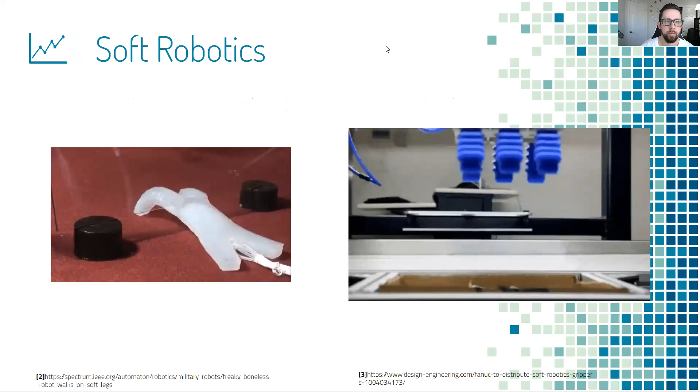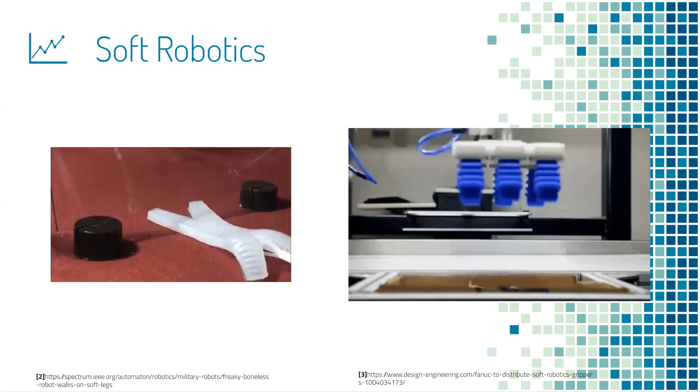Soft robotics are robotic systems made from all or mostly compliant materials, which can be advantageous compared to their traditional non-compliant counterparts. Soft robotics attempt to mimic many of the mechanical body systems found in nature. Having non-rigid or soft components, they are generally more adaptive, flexible, and resilient, and therefore can be more successful in harsh or unpredictable environments, as well as being potentially safer for human-robot collaboration.

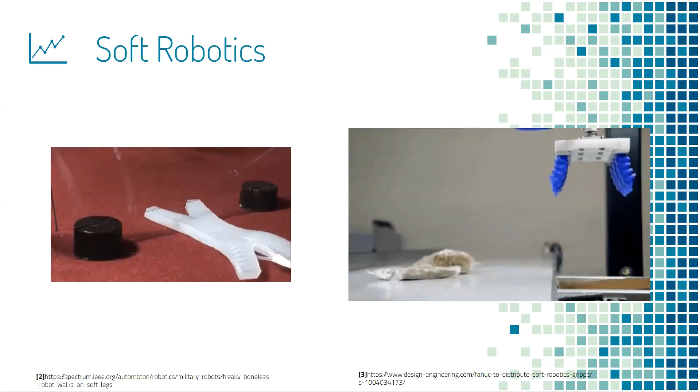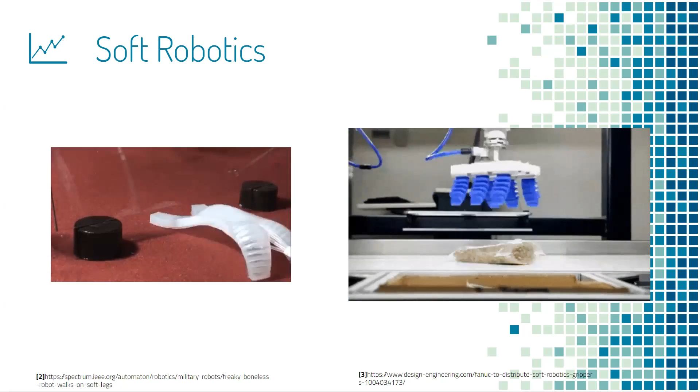Soft robots are less likely to undergo plastic deformation or mechanical failure due to impact or extreme external forces because of a compliant material's ability to elastically deform or dissipate forces. Soft robotic devices range from groundbreaking research-level concepts such as Harvard's variable gait crawling robot on the left, to refined products for industrial applications such as Fanuc's robotic gripper on the right.

One variety of soft robot, known as a tensegrity robot, is made of rigid, compressive members that are held together and in place by elastic tensile members. This combination of rigid links and elastic tensioners has been believed by many to be nature's preferred design scheme, as it is found in a multitude of different organic body systems, such as skeletal muscular systems, where rigid bones are held together under tension by muscles, tendons, and ligaments.

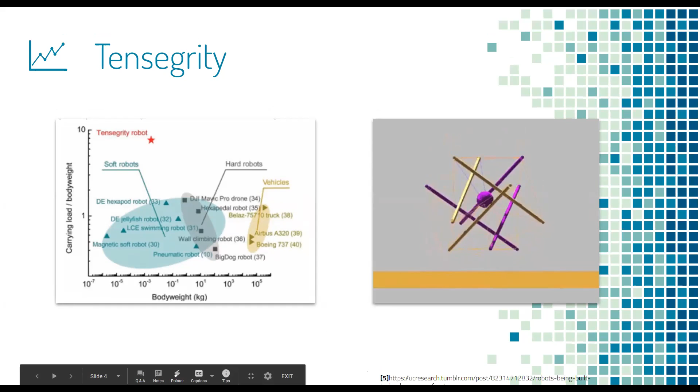Tensegrity robots are deployable, which is advantageous for applications where weight and size restraints are of high importance, such as space exploration. Spherical tensegrity robots are ideal for absorbing and distributing impact energy, such as ground collision after a substantial fall, as illustrated on the right here.

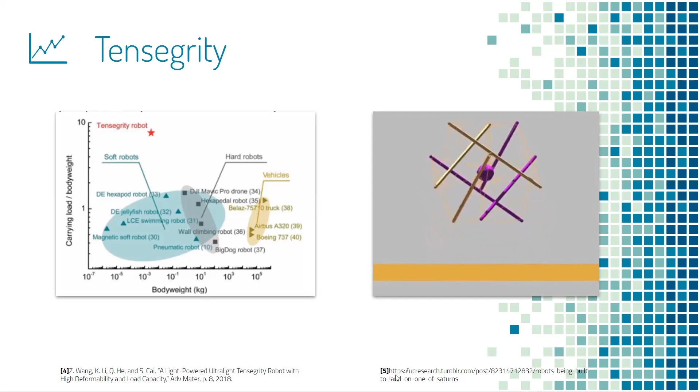On contact, the impact energy on a given rigid link is transferred to motion and further distributed into a combination of the six elastic members attached to it, and then eventually the surrounding links.

Various research groups have been investigating the benefits and attributes of tensegrity robots, and there has been an impressive amount of progress made over the last decade, but there are still many advantages to explore and challenges to overcome.

For instance, these two robots, the NASA SuperBallBot and Berkeley TensegrityBot, are great examples of large-scale, well-designed tensegrity robots. However, they are built with mostly rigid materials, making them heavy and more susceptible to catastrophic plastic deformation. Because of their traditional motor-driven cable actuation, they have an inefficient energy transfer and are not easily scalable, and require additional sensors for systematic feedback.

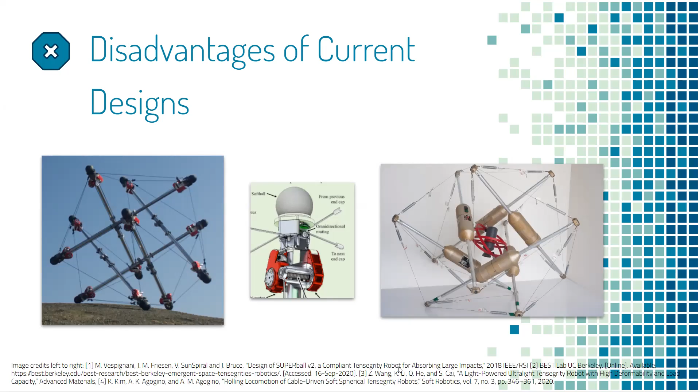There are also more complex tensegrity spheres with additional rigid links which are capable of traversing in a large selection of directions, but at the cost of simplicity, weight, and power consumption.

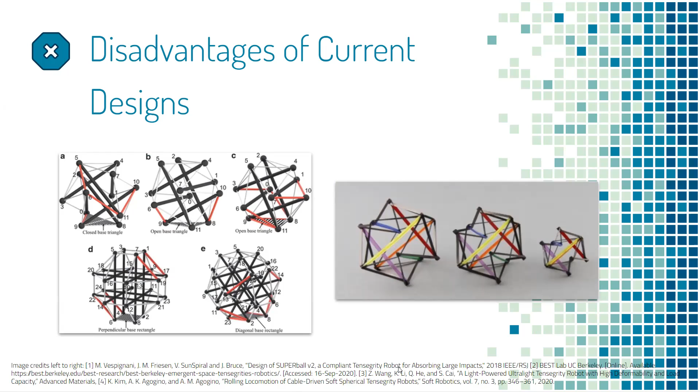Dr. Wang at UC San Diego has developed a small light-activated actuated tensegrity robot, shown on the right here, which has the drawbacks of being very slow to activate and is not self-contained since it relies on an external laser for muscle actuation. This scalable model could be improved by the addition of a lightweight, compliant, efficient linear actuator.

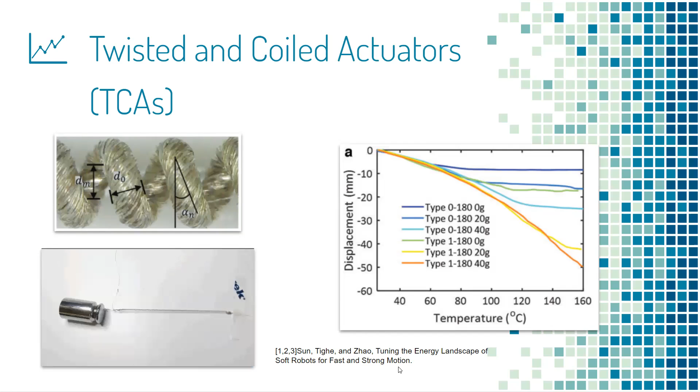Because TCAs are simple and made from common materials like nylon thread or fishing line, they are relatively cheap to produce. They have a large work density similar to that of a jet engine, at about 5.3 kilowatts per kilogram, and can produce a force approximately 100 times larger than a human muscle of the same length and weight.

They can be actuated using a low voltage power source and can simultaneously act as sensors to provide information about their displacement and deformation. TCAs produce no noise or visible emissions, and unlike traditional actuators, TCAs are made of compliant materials, making them ideal for soft robotic applications.

Our specific variety of TCA is unique in that it does not need to be pre-strained to achieve large stroke displacement of about 50% its natural length. The video on the bottom shows some characterization experiments and applications from our previous work.

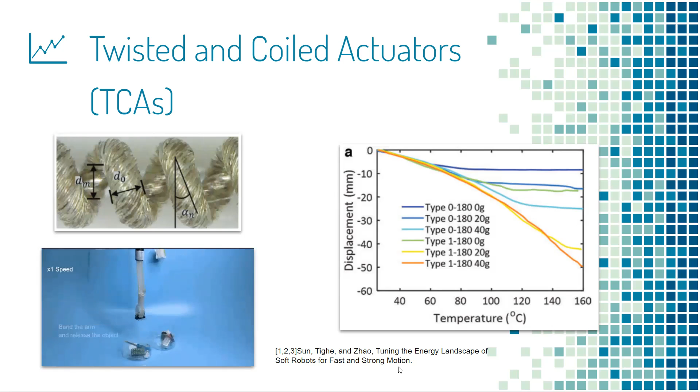In order to help organize the research process, we split the overall project into various logically ordered measurable goals, or specific aims. My first specific aim was to determine the optimal TCA configuration for this application. By adjusting parameters such as the helical angle, diameter, and annealing temperature, we can tune the TCA for a desired stiffness, displacement, and actuation force.

My second specific aim is to develop a modular tensegrity robot design to optimize time and resources during developmental testing. To avoid spending hundreds of hours building a robot that may catastrophically fail in seconds, we can modularize the system so that single components can be repaired or replaced. For instance, by developing a way to quickly remove and replace the mechanical and electrical connections of the TCAs, we can replace faulty units and test TCAs with different attributes without having to build a new robot each time.

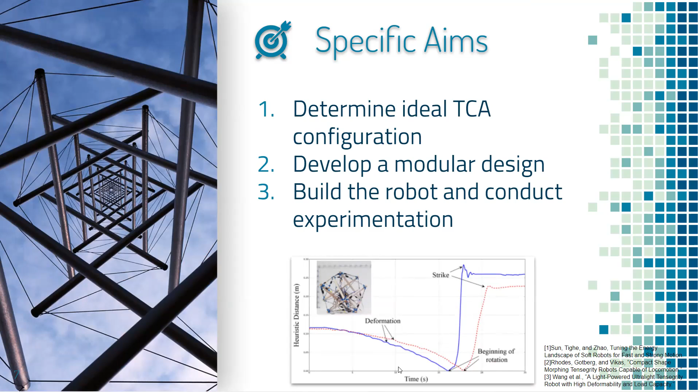Finally, my last specific aim is to build a robot so that it can be used for experimentation to collect data for quantifying its behavior and validation of theoretical calculations. I expect this to be the most difficult stage of the project, as there will likely arise complications and new challenges with the design.

Of the dozens of publications regarding 6-link icosahedral spherical tensegrity robots, 2 of them were exceptionally useful in determining the mechanical aspects of said robots: a thesis by Dr. Kim at UC Berkeley and an advanced materials journal by Dr. Wang at UC San Diego. Design parameters such as link length, actuator length, stroke and force, and pre-stress tension were derived from these publications and altered to fit our model.

Investigation revealed how center of mass manipulation can produce locomotion by essentially deforming the spherical tensegrity structure until the projected center of mass crosses over a chosen edge of the icosahedron space, causing the robot to topple in that direction.

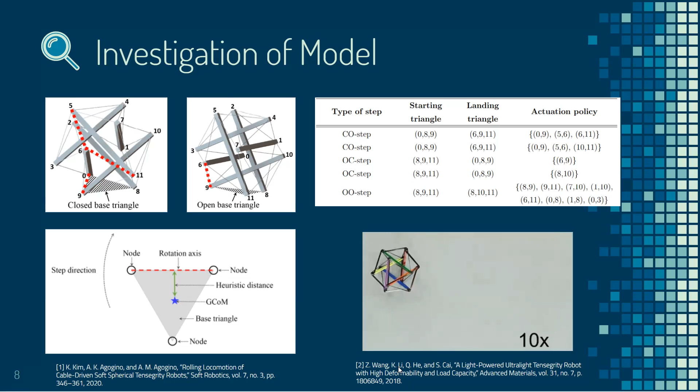The first step to developing a modular design was defining the design criteria and constraints. Some of the primary design considerations were to have an ability to make mechanical and electrical connections easily and quickly, to be able to maintain an appropriate TCA termination angle and position, to have efficient management of all the necessary wires, and to be able to adjust the tension of the installed TCAs.

Creative ideation and brainstorming led to several rudimentary ideas that were sketched out and refined. An initial design review was conducted with a panel of qualified individuals before the second round of brainstorming. Finally, 4 initial designs were considered, and along with the design requirements, a Pugh's design matrix was implemented for concept evaluation, and a final design was chosen.

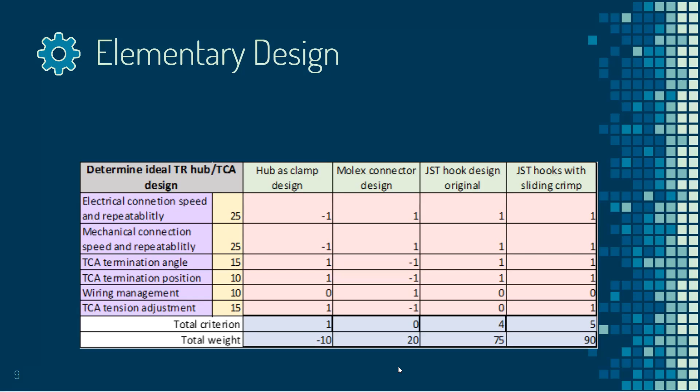The best design from the previous step was modeled in SolidWorks for multiple reasons. Having a 3D model of each component is necessary for 3D printing those parts, but can also be useful for performing finite element analysis and geometric and kinematic studies. I modeled each component of the Tensegrity robot and created an assembly to verify how they would work together.

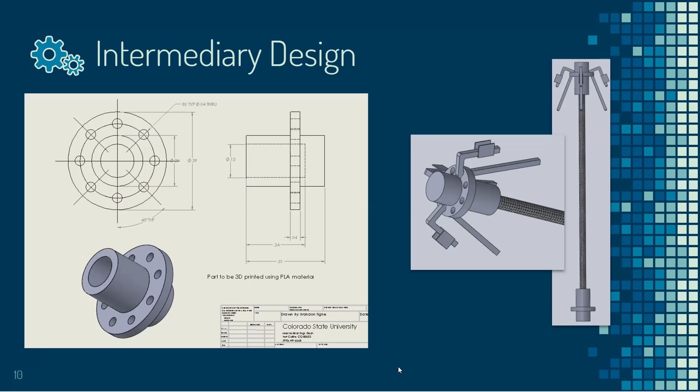The solid models for hubs were converted into a vector format, then sliced and printed using a Prusa MK3 1.75mm FDM printer and MatterHackers PLA filament, which was chosen for its high strength to weight ratio and dependability. 6 3.2mm diameter carbon fiber rods were cut to 100mm length and given a 1mm bevel using a Dremel tool before being fitted with the PLA hub on either end.

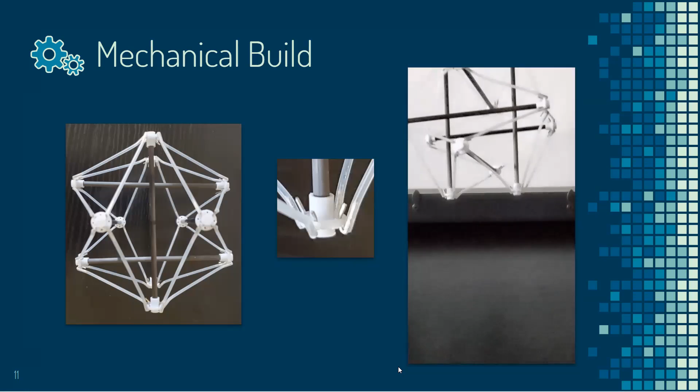The first iteration of the robot consists of 22 simulated TCAs made from silicone tubes and 2 active TCAs that will be used for initial testing. 90-degree JST headers were taken apart and each pin bent to represent a hook. 24 equal lengths of silicone tubing were cut to provide sufficient force to hold the Tensegrity robot in a deployed state, which was calculated to be about 0.2 newtons.

The pre-strain required on the silicone tube to provide said 0.2 newton force was determined using a Mark 10 ESM 303 force and displacement measuring tool. The pin hooks were fixed into the ends of the tubes using adhesive, and the Tensegrity icosahedron was assembled.

2 TCAs will be cut to the appropriate length and have hooks and male JST pins crimped to the ends like the example on the next slide. After assembling the Tensegrity structure, 2 of the simulated TCAs will be replaced with active TCAs.

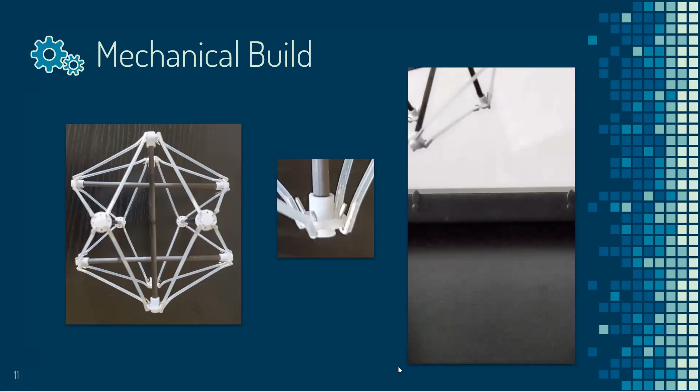The straight male JST pins on either side of the TCAs act as electrical connectors to work in tandem with 0.6mm JST sockets attached to 28-gauge insulated conductors.

One side of each of the active TCAs will be connected to a common ground and the other side through a Pololu DRV8835 dual motor driver to a power source. The system will be controlled using an Arduino microcontroller.

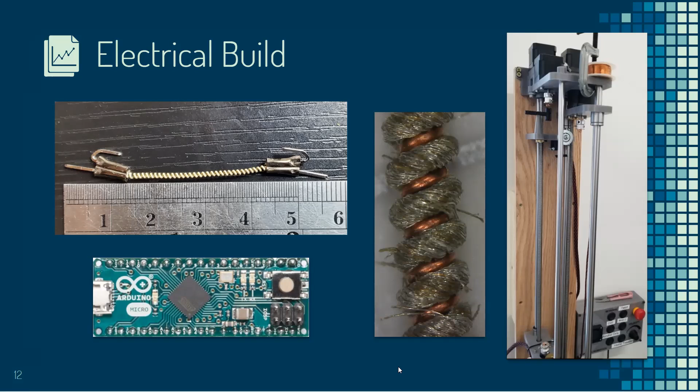The first iteration robot will have 2 active and 22 simulated TCAs, which will produce 2 steps. The second iteration will be fully equipped with 24 TCAs so that it can move in any direction from any start orientation. Both iterations will initially be powered by a variable power supply before being upgraded to battery power so as to aid in the development of a standalone or non-tethered system.

Now this slide wasn't originally going to be in here, but I felt like I wanted to add it. I got this video last night and I didn't think the project would be to this point at this time, but I was happy to see that I was able to get it this far.

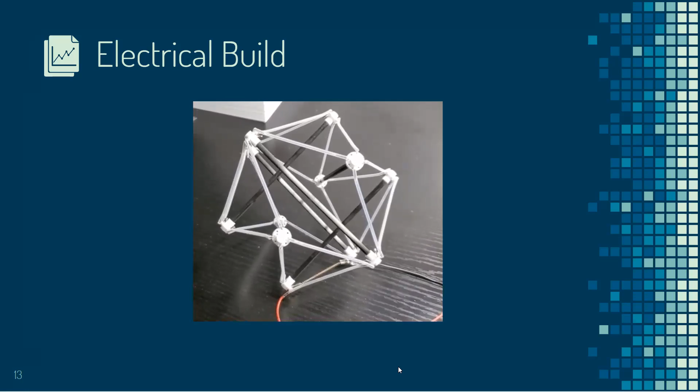This is actually a video of the very first step that the Tensegrity robot was able to take. It's taken from a simple orientation, from a closed triangle orientation, and it's only using one actuator. But this little experiment actually is pretty useful in determining a lot of things.

The microcontroller programming will be done using Arduino language, which is a derivative of C++. There will be 2 distinct routes for writing the code, both of which will work to control robot locomotion.

First, the simpler method is much more straightforward, less computationally expensive, and easy to execute. This technique will use timed power delivery routines to realize predetermined actuation protocols. This method relies heavily on an operator understanding the starting orientation, desired path, and the capabilities of rolling locomotion.

The other option is to make a more complex code which will move the robot towards autonomy and can even compensate for unexpected terrain or robot damage. These types of complex systems rely on sensory feedback and can use machine learning to plan ideal actuation policies.

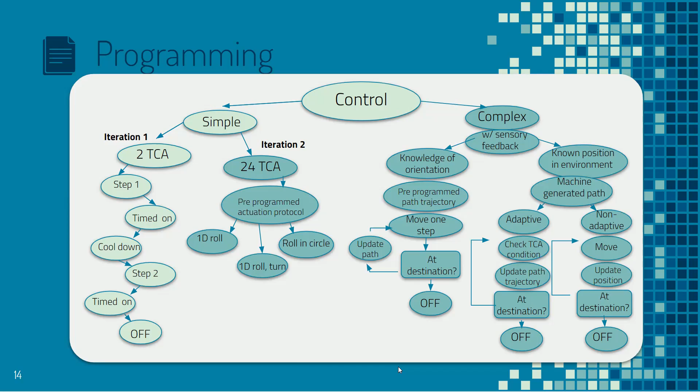There are several areas where unforeseen complications could arise with this project. Mechanically, the TCAs may experience a high enough stress relaxation rate so that the robot is unable to stand under its own weight without constant or periodic contraction of all the muscles.

A simple solution for this problem is to build a complete tensegrity structure with simulated TCAs, which will act as springs, attaching the TCAs without any pre-strain in parallel with them.

In the unlikely event that the TCAs cannot provide enough actuation force, two of them can be installed in parallel, or the helical angle can be lowered to increase actuation force. If the TCAs do not provide enough displacement, they can be pre-strained, which will increase effective stroke distance.

Completion of phase 2 of the project, specifically untethering it, will be a challenge. Packaging a microcontroller, suitable battery, and 24 motor drivers, which serve as impromptu micro relays, in a small enough manner to fit in the center of the bot will require some effort.

If all else fails, scaling the robot size up to accommodate the controls hardware will be a viable solution to this problem.

Specific aims 1 and 2 are determining TCA parameters and designing the robot, respectively. They were started simultaneously and are primarily independent of each other, whereas specific aim 3 cannot be started until the preceding steps were nearly complete. Note that the completion of the design task is tentative and depends strongly on how successfully the robot functions during intermediary experimentation.